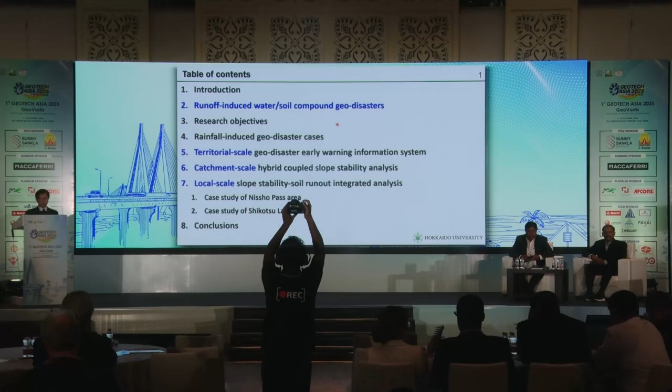First, I'd like to introduce the background of this research. Geo-disasters such as shallow landslides and debris flow occur widely and frequently in Asia. Torrential rainfall from sources such as typhoons and the rainy season is one of the main causes. Besides, the IPCC forecasts that the frequency and intensity of torrential rainfall are expected to increase as extreme weather events become more frequent in the future. Therefore, it is very important to study the mechanism of rainfall-induced landslides with consideration of the runoff surface flow for better hazard control in the near future.

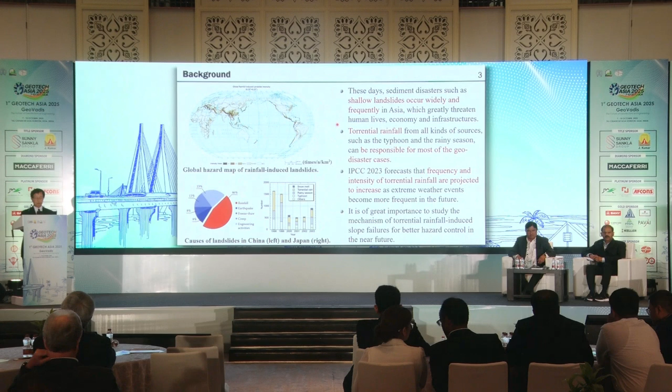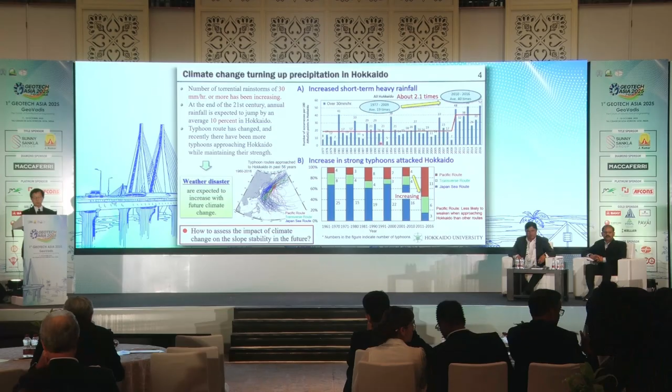Please note that this table is from the Japanese Meteorological Agency. In general, in case of rainfall intensity over 30 millimeters per hour, soil ground cannot absorb all the rainwater, and rainwater begins to run off onto the ground surface. Therefore, this assessment for heavy rainfall-induced slope failure should be done by considering rainfall infiltration and surface runoff.

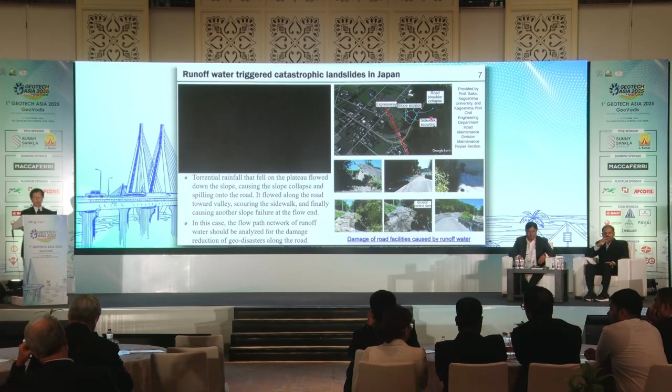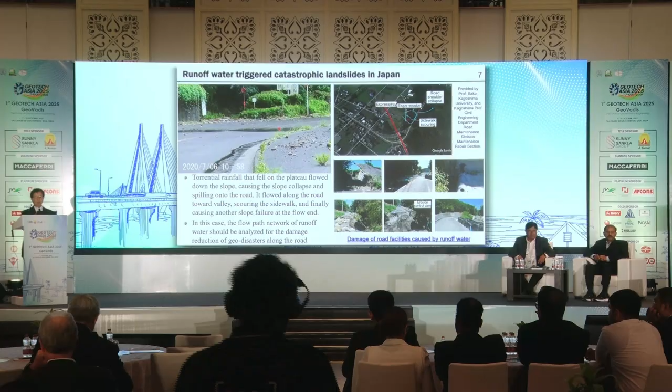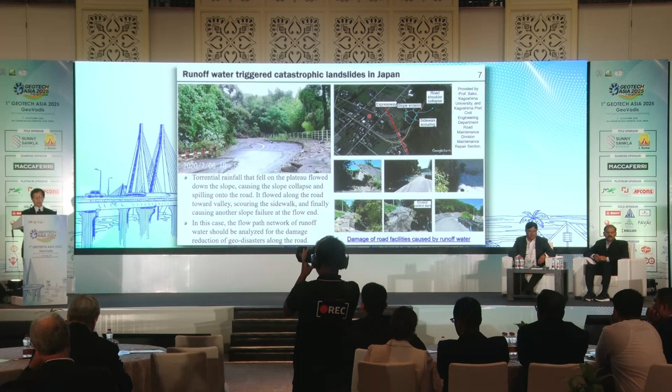Then, I'd like to introduce the runoff-induced water-soil compound geodisaster. What is it? This slide introduces one example of the runoff-induced geodisaster during torrential rainfall. Rainfall that fell on the plateau flows down the slope, causing slope failure, and also flows down along the road, moving toward the valley, scouring the sidewalk, and finally causing slope failure at the flow end. In this case, the flow network of the runoff water should be analyzed for damage reduction of the geo-disaster along the road.

This is another example of runoff water triggering a catastrophic landslide in Hokkaido. In this geo-disaster, as shown in the figure, many serious slope failures occurred at the cross point of the flow path and road network. This is because these factors cause accumulation of topography of the surface flow and seepage flow. If the rainfall intensity is higher than the infiltration capacity of the ground, rainwater that cannot infiltrate into the soil ground flows down the ground surface. Therefore, the risk of heavy rainfall-induced slope failure should be evaluated by considering both surface flow and seepage flow.

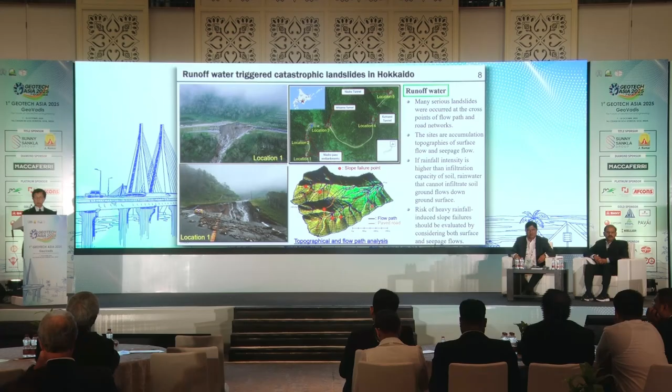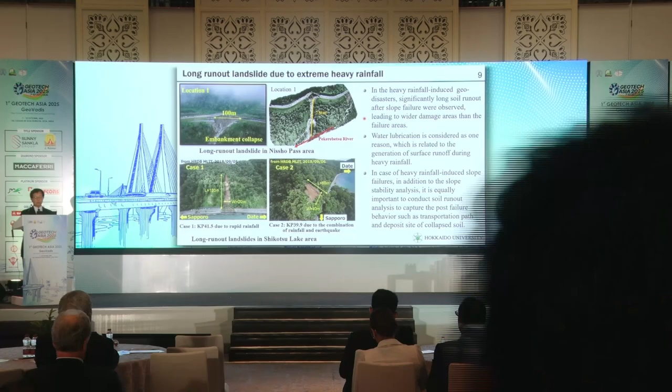In addition, these figures show three previous serious landslides that occurred in Hokkaido. In these geo-disasters, significantly long soil runout, as shown in this figure, was observed, leading to a wider damage area than the failure area. In this case, water lubrication is considered as one of the reasons for this phenomenon. Therefore, in case of heavy rainfall-induced slope failure, in addition to slope stability analysis, it is important to conduct soil runout analysis to capture the post-failure behavior, such as the transportation path and deposit site of the collapsed soil.

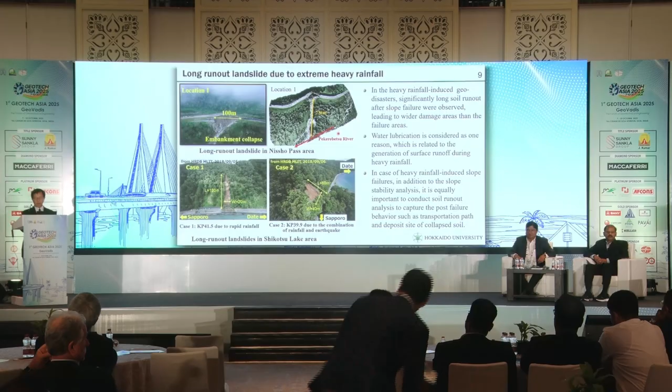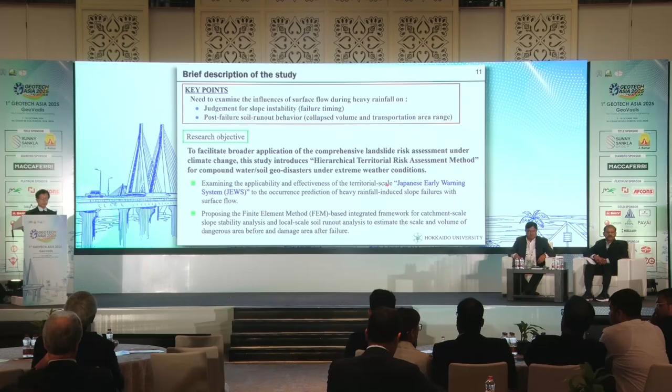Keeping in mind these key points laid out in the introduction, this study introduces a hierarchical territorial risk assessment method for the compound water-soil geodisaster under extreme weather conditions. For this end, in this study, I would like to discuss two research topics. To develop the risk assessment method for rainfall-induced slope failure with surface flow, we propose a hierarchical territorial risk assessment for the compound water-soil geodisaster by using multi-phase and multi-scale analysis, as shown in this figure.

This method consists of three scale levels. Level 1 is a territorial scale early warning system for extracting the alert mesh. In Japan, we announce warning information in a 1 kilometer by 1 kilometer mesh. This is the minimum area used in Japan.

Level 2 is the catchment scale slope stability analysis. If we use a very high performance computer, we can do numerical estimation at 1 kilometer by 1 kilometer scale. The last one is level 3, local scale soil runoff analysis, where we estimate the disaster-prone area.

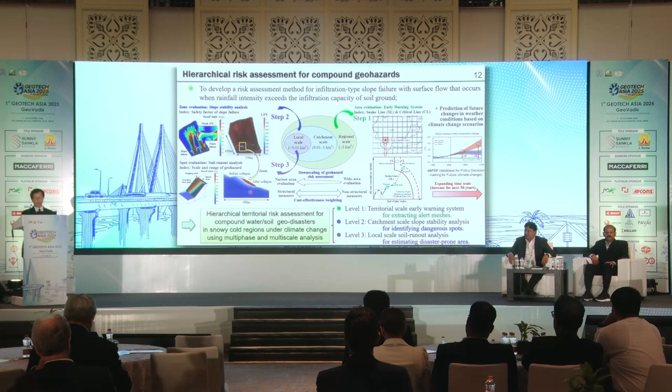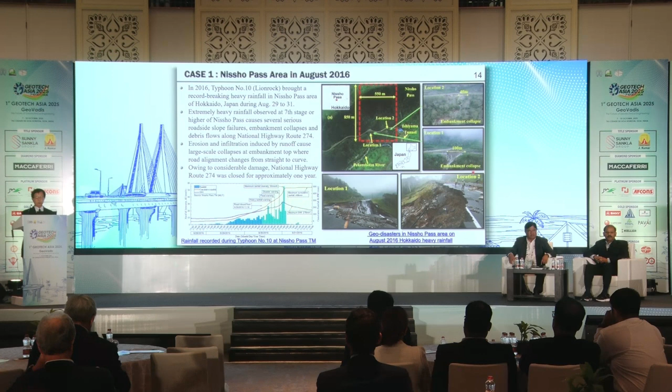First case is a slope failure in the Nissho Pass area in August 2016. Extremely heavy rainfall caused several serious roadside slope failures. Along the national highway, as shown in this figure, at the seventh stage of the Nissho Pass, erosion and infiltration induced by the runoff caused a large-scale collapse like this. Owing to the considerable damage, this highway was closed for approximately one year.

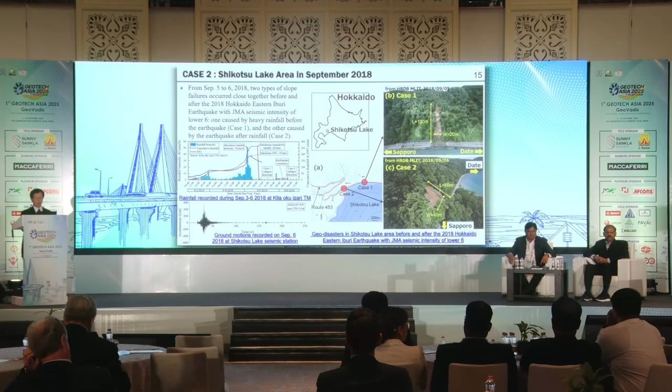Next, second case study is a slope failure in the Shikotsu Lake area in September 2018. From September 5th to 6th, 2018, there are two types of slope failure close together before and after the very serious earthquake. Case 1 is caused by heavy rainfall before the earthquake, and case 2 was caused by the earthquake after the rainfall.

Then go to the first scale level. I would like to discuss the territorial scale geodisaster early warning information system. First, I'd like to briefly introduce the territorial landslide early warning system employed in Japan. The Japanese government initiated the new nationwide early warning system for geodisaster in 2005.

The early warning system is a comparatively novel numerical model for rainfall-induced shallow landslides. Based on this system, the Japanese government announces sediment disaster warning information and evacuation information to residents in the dangerous area.

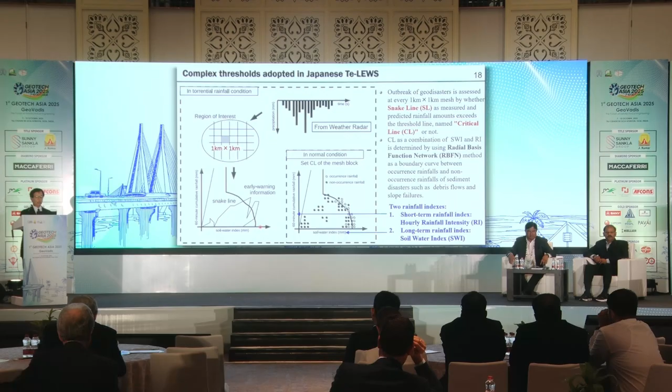In the Japanese early warning system, outbreak of the geodisaster is assessed by a 1 kilometer by 1 kilometer mesh, by checking whether the snake line, which consists of the measured and predicted rainfall amount, exceeds the threshold line named the critical line. In this case, the snake line exceeds the critical line, then the slope failure occurs.

Next, I would like to verify the applicability of the Japanese early warning system by confirming the relationship between the critical line and snake line. In both slope failure cases, the snake line exceeded the critical line near the estimated time of the slope failure. This indicates that the Japanese early warning system appropriately detects the occurrence of slope failure, even in landslides caused by heavy rainfall where surface runoff was observed. This demonstrates that the applicability of the Japanese early warning system as a territorial scale risk assessment method for rainfall-induced landslide disaster is sufficiently high.

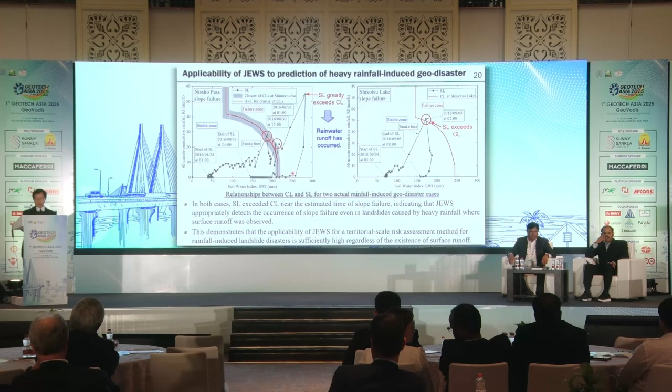So using this kind of prediction method, we can correctly predict the occurrence of slope failure. However, this is only for the 1 kilometer by 1 kilometer mesh, so we do not know the correct location of the slope failure. Therefore, we need to do catchment scale hybrid coupled slope stability analysis.

To develop the risk assessment method for the infiltration type slope failure with surface flow, where rainfall intensity exceeds the infiltration capacity of the soil ground, we employ a hybrid coupled model of surface flow, subsurface flow, and soil mechanics as shown in this figure. The effect of surface water flow is usually neglected in traditional slope stability analysis. Using this method, we can examine the effect of surface water flow on the local safety factor of the soil element by analyzing the runoff, infiltration, and slope instability simultaneously.

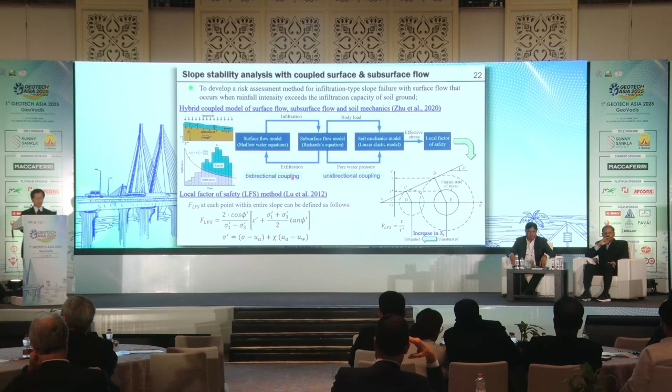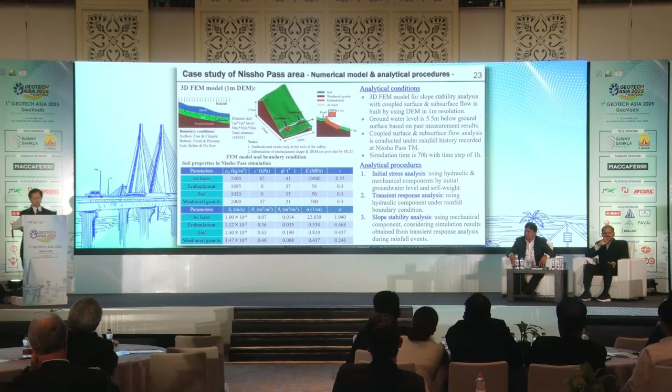This slide shows the hydraulic behavior of the simulation site. As shown in this figure, rainfall intensity increases, infiltration capacity gradually decreases, leading to the generation of surface runoff, when the rainfall intensity exceeds the infiltration capacity.

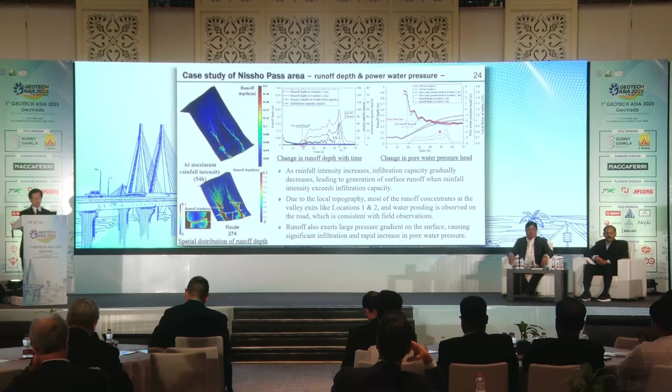As shown in this figure, due to the local topography, most of the runoff concentrates at the valley exit, like location 1 and location 2, and water ponding observed on the road, which is consistent with field observation. And runoff also creates a large pressure gradient on the surface, causing significant infiltration. Therefore, we can observe a rapid increase in pore water pressure as shown in this figure.

This slide shows the mechanical behavior of the simulation result. As shown in this figure, local safety factor rapidly decreases with the increase in pore water pressure after surface runoff generation. This indicates the adverse effect of surface flow on slope stability.

Besides, as shown in this figure, the location and length of the estimated danger spot by numerical simulation agree well with the field investigation. However, though the landslide with a shallow depth at location 2 can be well reproduced.

However, in case of location 1, due to the neglect of the progressive slope failure mechanism and surface erosion caused by the high velocity surface flow, the depth of the slip surface is underestimated.

Actually, as shown in this figure, the maximum runoff velocity at location 1 greatly exceeds the critical erosion velocity, while it is noted that the excess at location 2 is small.

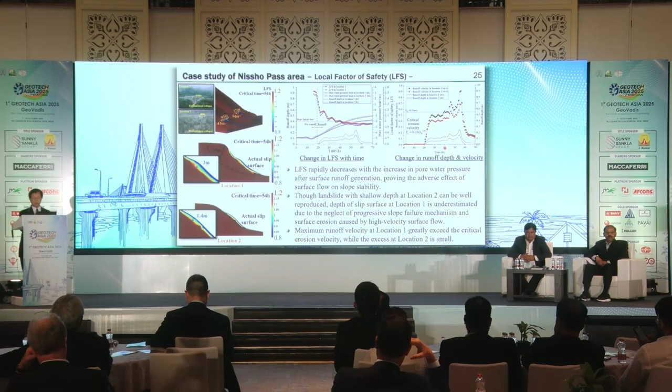This slide shows the simulation result for the Shikotsu Lake area. The trend of the simulation result is similar to the Nissho Pass. However, the simulated unstable zone closely matches the field condition, unlike location 1 at the Nissho Pass.

This is because in this case, runoff velocity briefly exceeds the critical erosion velocity, while both magnitude and duration of the exceedance are smaller as compared with location 1. This means that the occurrence of surface flow erosion is limited, like location 1 and location 2 at the Nissho Pass.

Consequently, the surface runoff plays an important role in promoting rainfall water infiltration and triggering slope failure. These numerical simulation results also demonstrate the capability of the catchment scale hybrid coupled slope stability analysis to accurately identify the occurrence spot and dangerous area of heavy rainfall-induced slope failure.

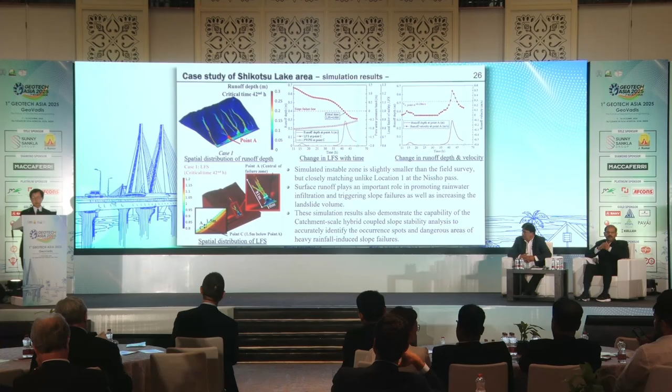Finally, let's go to the third scale level about the local scale slope stability and soil runout integrated analysis.

To develop the risk assessment method for modeling the complex dynamic behavior of post-failure soil water mixture, considering the surface flow and subsurface flow under heavy rainfall, we employ the slope stability and soil runout integrated analysis as shown in this figure.

In this study, we integrated the slope stability analysis with the soil runout analysis using the depth average equation to study the slope failure and subsequent landslide transportation process, for more computational efficiency in large-scale complex phenomena. Three minutes, okay.

Actually, in this flowchart, the first step is the slope stability analysis, which is the same as the former section. The second step, the next step, is the soil runout analysis.

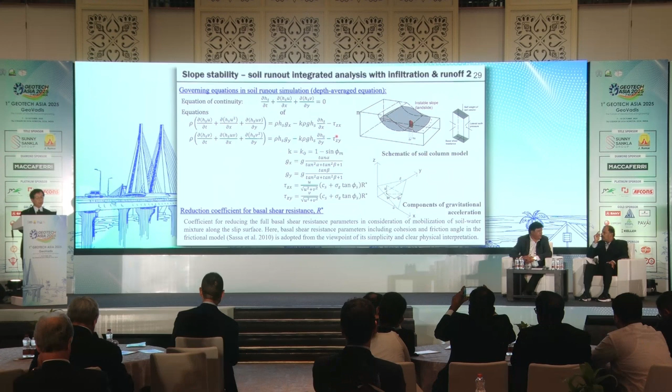Using this kind of equation, we can evaluate the soil runout failure. This slide shows the first case study, that is Nissho Pass location 1. The numerical model and the material flow parameters for the soil runout analysis are shown as follows.

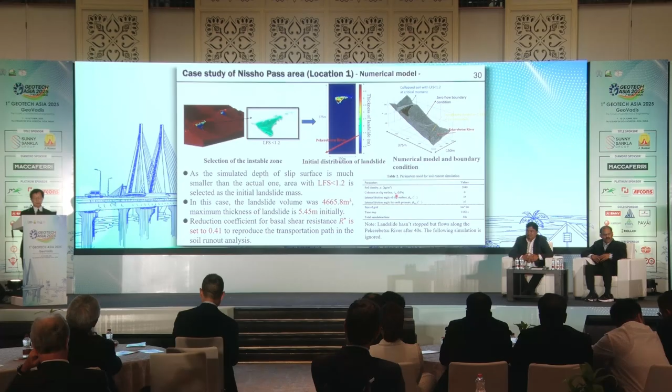As the slip surface is underestimated in the slope stability analysis, the area with local safety factor less than 1.2 is selected as the initial landslide mass. Also, the reduction coefficient of the basal shear resistance is set to 0.41 to reproduce the transportation path in the soil runout analysis.

This is the result of location 1. In the case without reduction of shear resistance, no obvious soil runout behavior is observed. However, if we use the reduction coefficient, the soil runout simulation can successfully reproduce the soil runout process photographed by the UAV, which demonstrates the effectiveness of the calibrated parameter.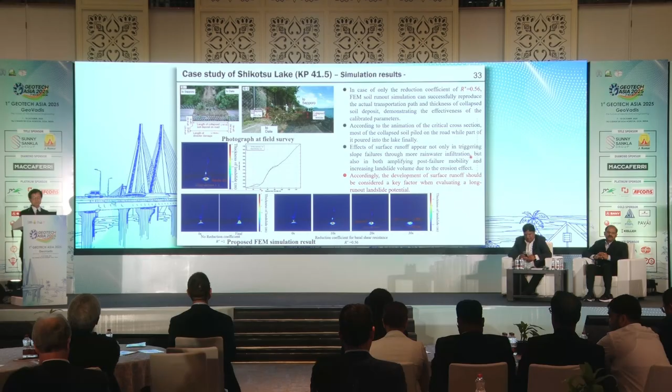So maybe if we want to use this kind of investigation, we can use this relationship. The reduction of the local safety factor and the reduction of shear resistance is closely related to the landslide velocity and landslide density.

Now let me summarize my talk. This study introduced a hierarchical territorial risk assessment method for compound water-soil geodisasters, and applicability and effectiveness were examined through two case studies of extremely heavy rainfall-induced geodisasters that occurred in Hokkaido, Japan.

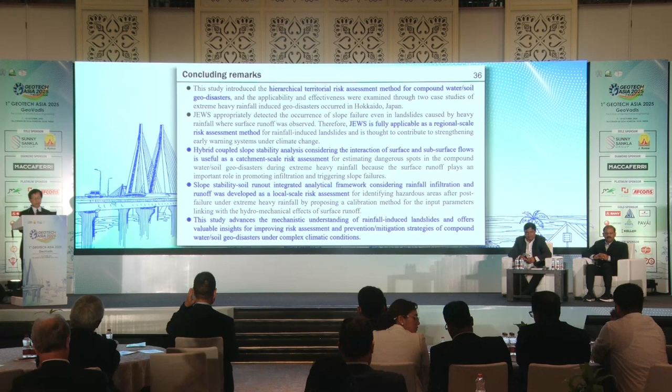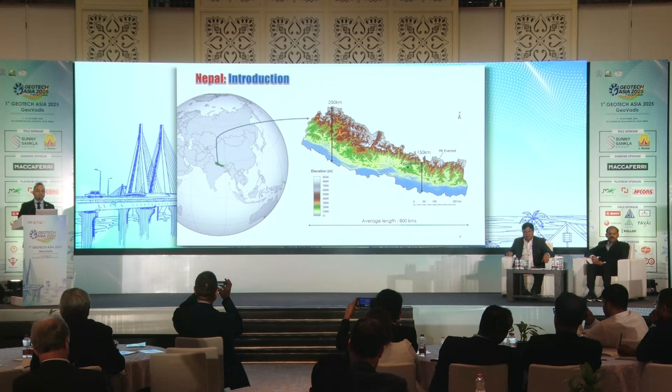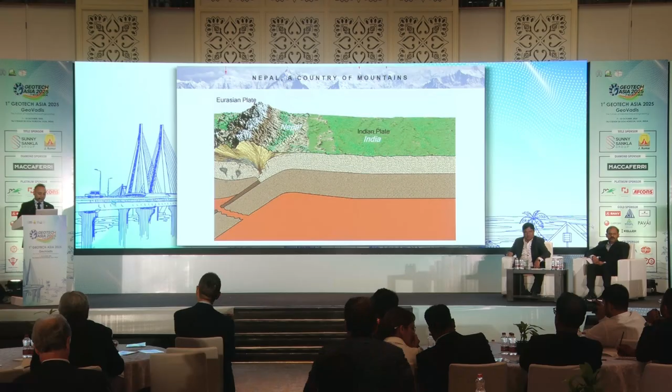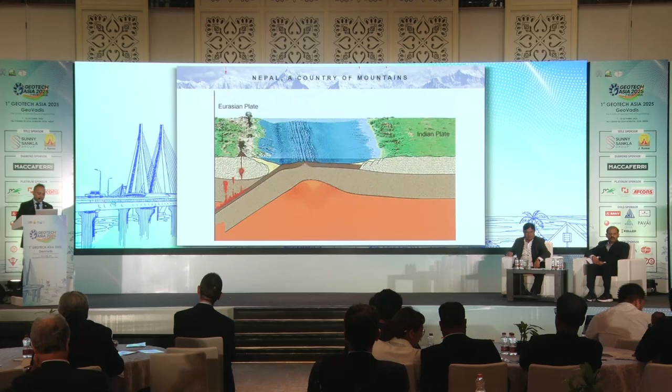I believe we are all aware of the tectonic movement of this region, the Hindu-Kush region. The Indian plate is moving northward towards the Eurasian plate at a rate of about 1.8 to 4 centimeters per year, depending on the specific location and measurement methods. The average convergence rate near the Himalaya, near Nepal, is around 4 centimeters per year. This results in the formation of beautiful mountains and Himalayas.

The world's eight highest Himalayas, including Mount Everest, are in Nepal. Interestingly, these Himalayas are the freshwater source for about 1.9 billion people, that means one-fourth of the world's population. These are the largest sources of fresh water beyond the polar regions.

Okay, from the beauty and the sceneries, now I want to take you towards the earthquake and the disaster. This Hindu-Kush Himalaya region extends across the country from Afghanistan to Myanmar, almost 8 countries, forming one of the most seismically active mountain belts on Earth.

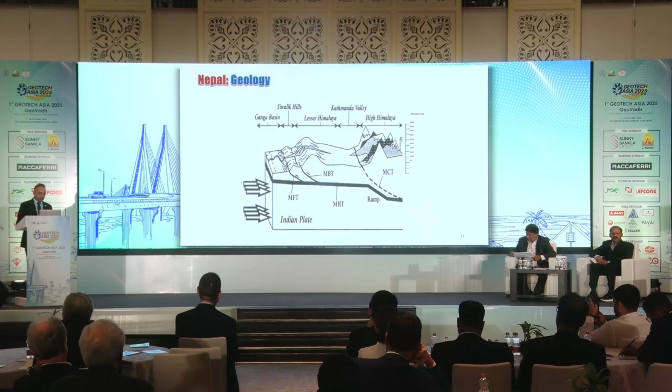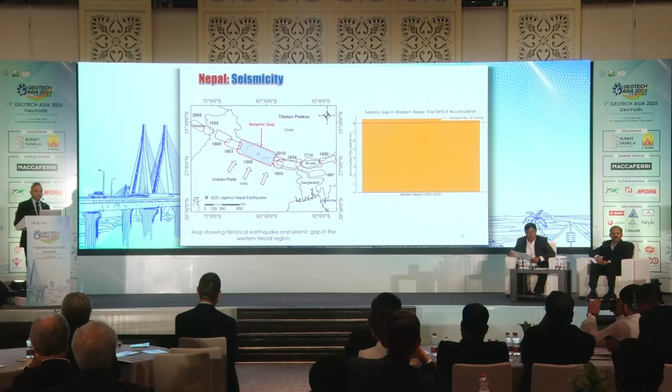This is the disaster perspective of Nepal due to risks of long, steep and fragile mountains. During the time of earthquake, we had risks of liquefaction in the valley and the Tarai region. We have risks of landslide in the mountains and Himalayas, risks of GLOF, and also risks of avalanches, and all the disasters have a cascading effect.

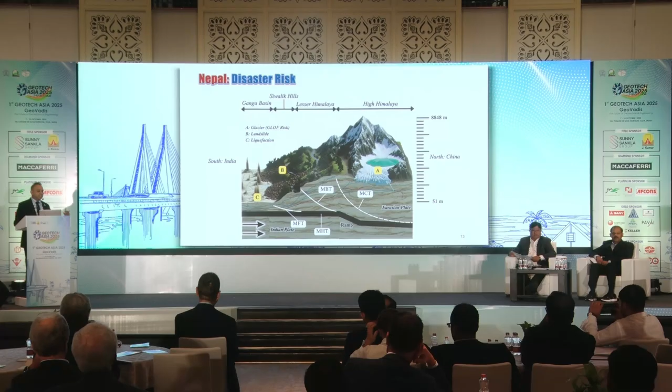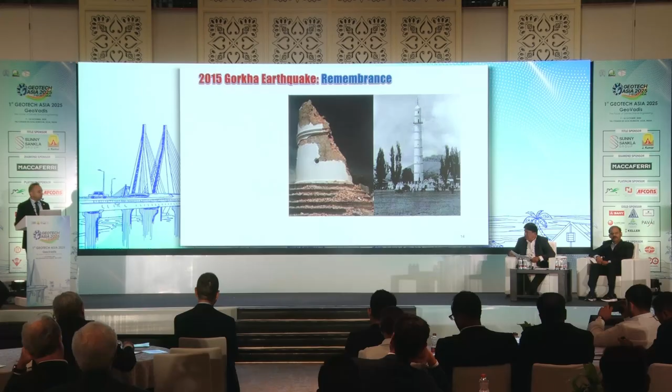Now let's travel to the Gorkha earthquake disaster. This is one of the monuments of Nepal. It was built almost 200 years ago for military purposes and is considered a monument of pride for the Nepalese. It was totally demolished during the earthquake. The Gorkha earthquake had a magnitude of 7.8, a depth of 8.2 km, and was almost 76 kilometers west of Kathmandu.

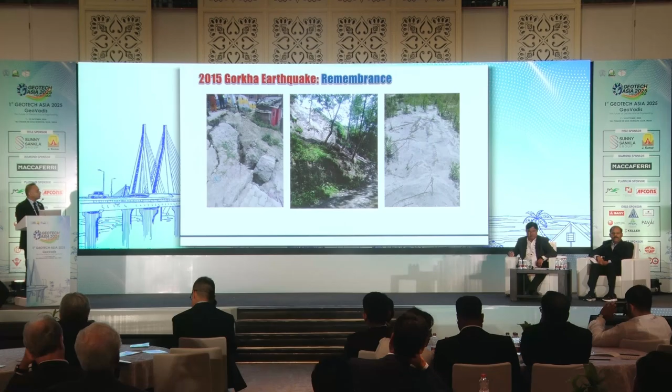This is the photograph near the Kathmandu Valley, in the countryside of Kathmandu Valley - the side picture. This picture shows the liquefaction that occurred in Kathmandu Valley. This shows the landslides, and this is the land subsidence in Kathmandu.

In the Gorkha earthquake, the peak ground acceleration was not as much as expected. It was only 0.183, although we experienced signs of liquefaction in 26 places. After calculating the factor of safety with borehole data of around 400 boreholes in Kathmandu Valley, the points where signs of liquefaction were seen lie in the high risk zone. This shows that if we have an earthquake of larger PGA, we can experience liquefaction in a larger part of Kathmandu Valley.

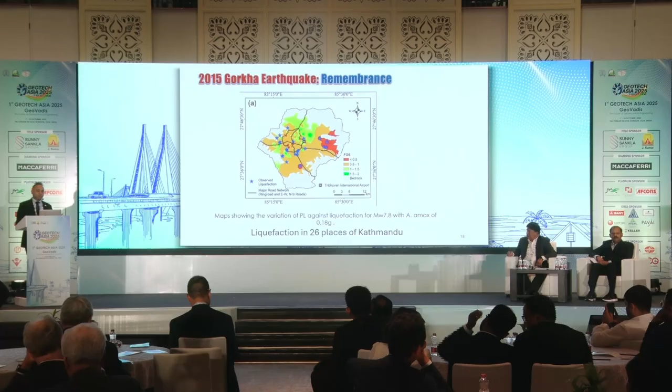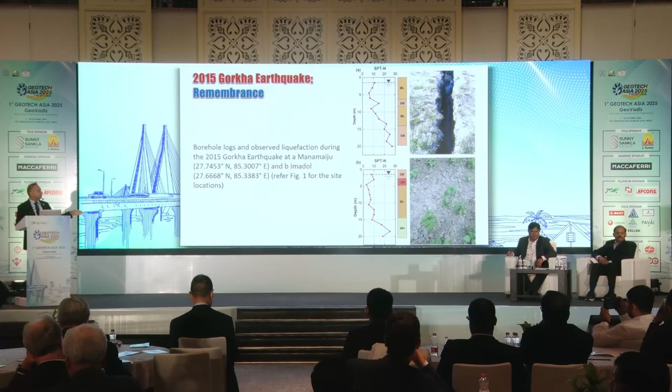These are the places where we had liquefaction, and the boreholes from those places show very low SPT values. These are places in the mid-city with liquefaction and land subsidence, where buildings are tilting - although structurally they seem stable, due to land subsidence they are tilting here and there. This is in the Thamel area of Kathmandu, a touristic place full of hotels, where the buildings were tilting in this way.

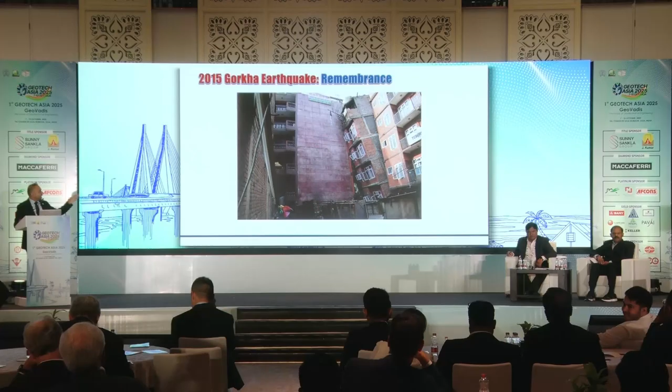We did a good reconstruction and showed the globe that we had completed the reconstruction in a good way. We almost reconstructed 90% of houses. We trained more than 3,500 engineers for the retrofitting, and also produced skilled manpower.

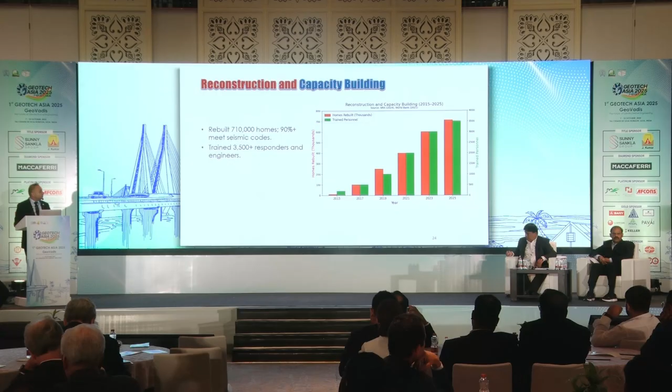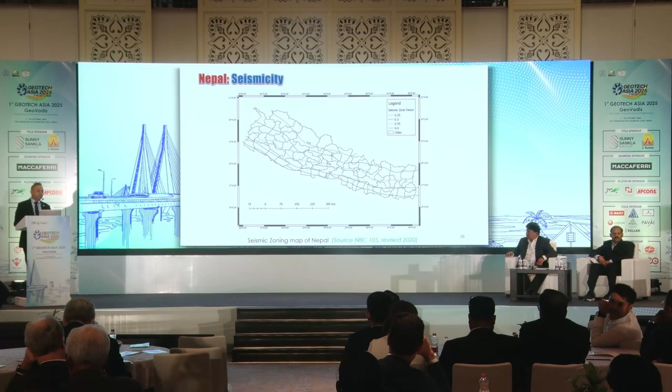The Jajarkot earthquake, I call it a bad reminder, because we said to the people, to the globe, that we had finished in a good way. We did the reconstruction, we have trained many engineers. But almost after 10 years of the Gorkha earthquake, the same situation happened.

Now let's take a tour of the Jajarkot earthquake, which was a little bit small, very small compared to the Gorkha earthquake, only 5.7 magnitude, and the effect was almost in a 10-kilometer area. In that 10-kilometer area, almost all the buildings were damaged.

In Jajarkot also, regarding the ground acceleration, we do not have too many recording stations, but the nearby station showed the ground acceleration was not so high, less than 0.1 G. We also had ridge effect, basin effect, and local site effects, all in one place.

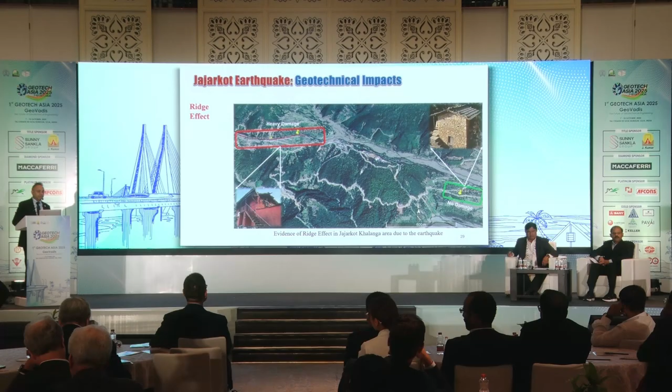Here you can see the ridge effect. The settlements in Nepal are basically on ridges and some in the valley riverside. The buildings on the ridge were totally damaged at the time of the landslide and earthquake.

In this picture you can see Rimnaga, where the highest number of people died in this village. It was nearby the river, and here we had the basin effect.

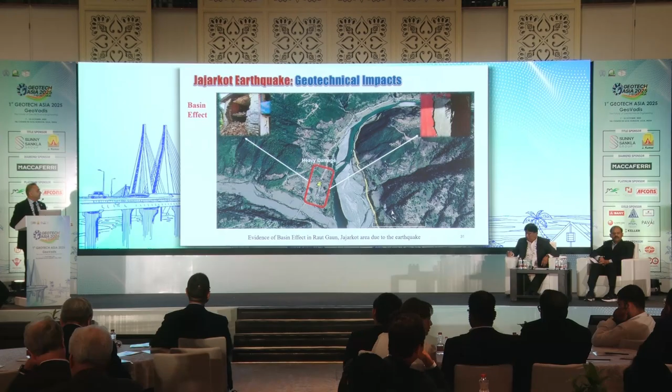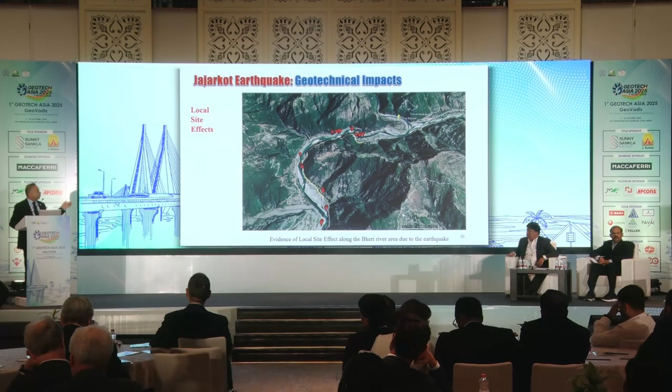This is also another example of the basin effect, and we also had local site effects. There were some river deposit villages, and in places where there was river deposition, the structures established in these deposits were highly damaged.

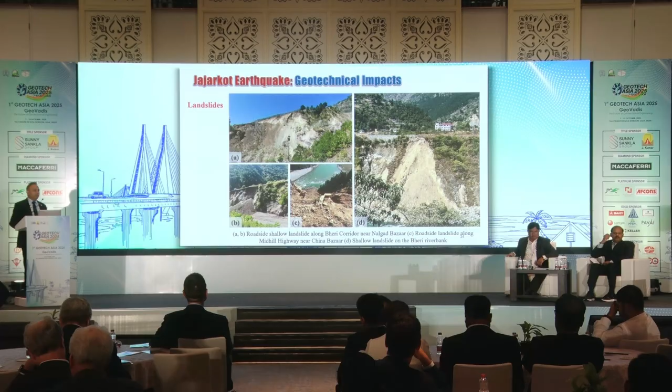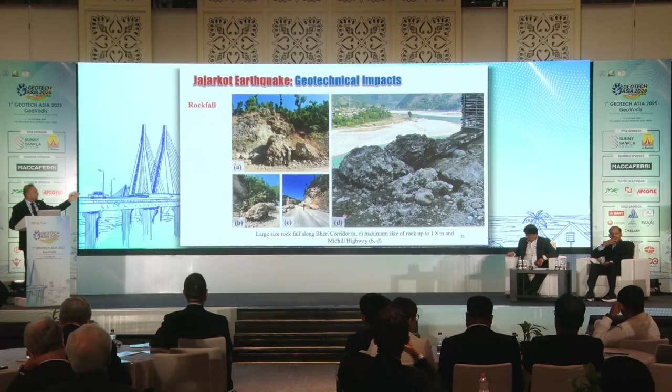We experienced more than 160 landslides at these places. These are the landslides that we measured in the field. Here our team is measuring the size of rocks that fell on the highway.

We are measuring the condition of the highway, this is a Midhill Highway, at the time of that Jajarkot earthquake. These are the structures that fell due to the earthquake, and the roads also had subsidence failure.

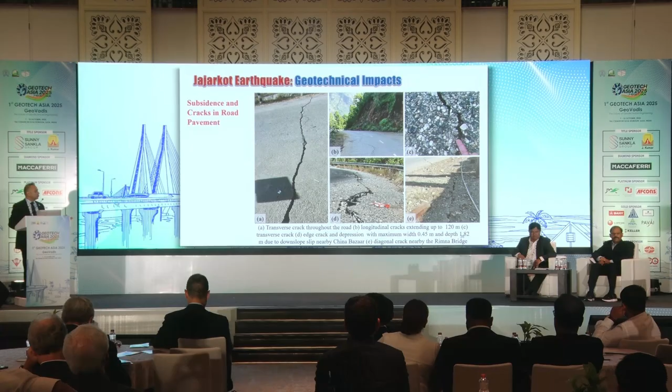This is the area we surveyed, and these are the typologies.

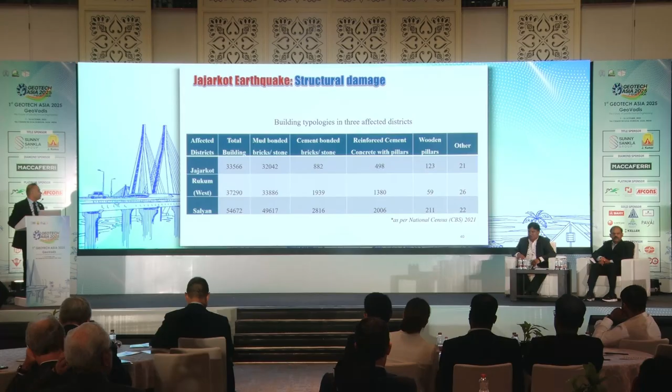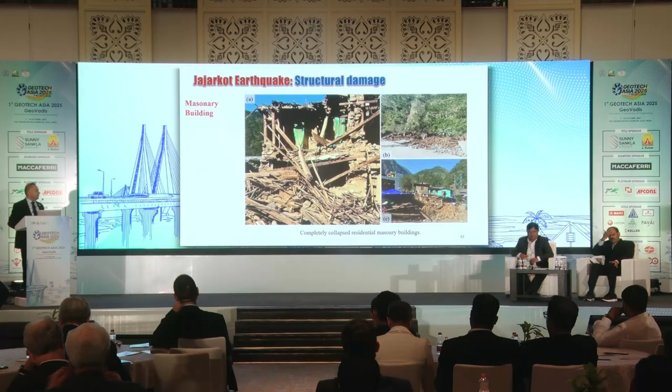Most of the masonry structures are totally damaged in the Jajarkot earthquake too. Here you can see the different types of failure of the structures. I will read fast.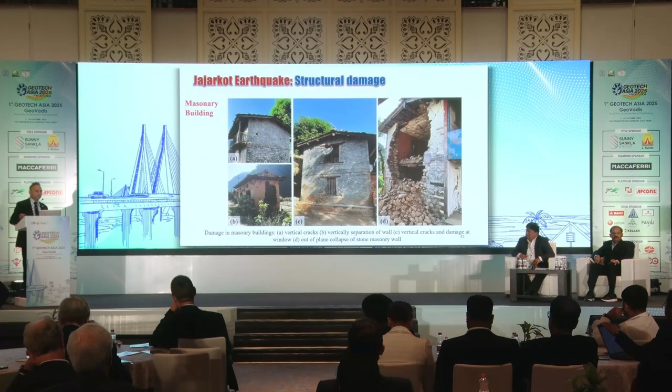The damage of masonry structures shows roof failure and failure of supporting walls of buildings, and damage of masonry buildings with out-of-plane collapse of stone masonry walls. There we can also see the masonry walls are damaged.

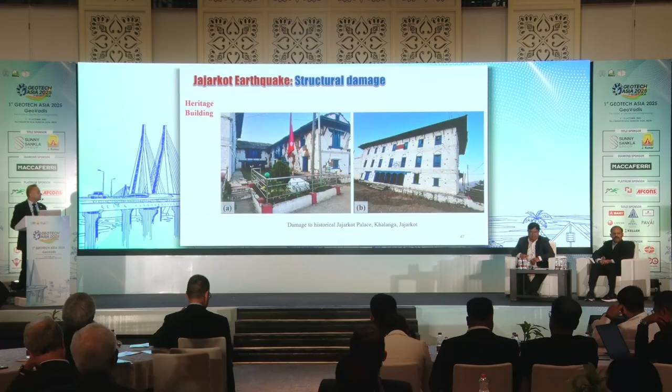This is one of the historical buildings, constructed almost 600 years ago. It's the palace of the king—there were many small kingdoms in the country—and it was also almost completely damaged.

For the RCC buildings, they are safe, but some points and joints were cracked. They were safe to stay in with minor maintenance.

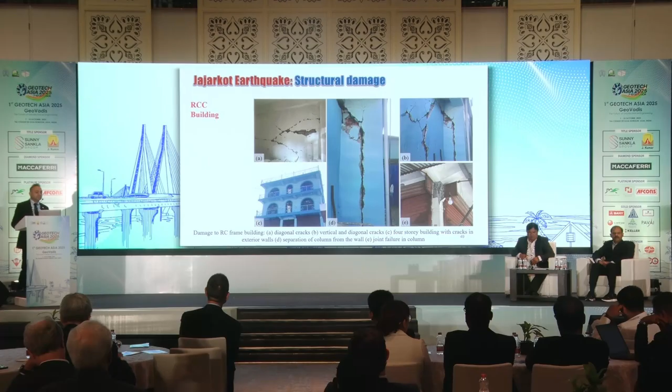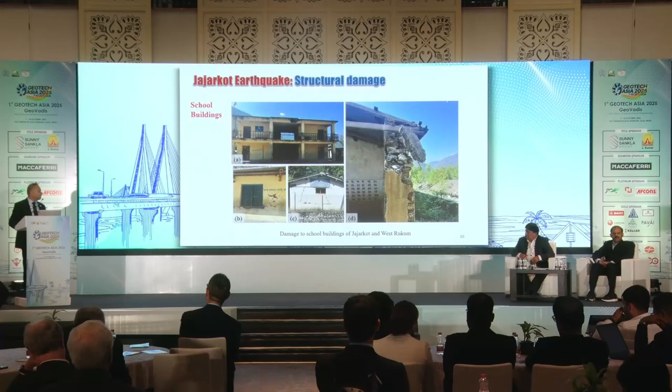These are the school buildings. In this area, most school buildings are in this condition. The buildings with an RCC framework can be used after some maintenance, but the masonry buildings were totally damaged in the Jajarkot area too.

There was a bridge, only one RCC bridge in that corridor, a stable RCC bridge. The deck, the slab of the bridge, was shifted by about 2 inches. This showed how such a small earthquake can shift the deck of a bridge.

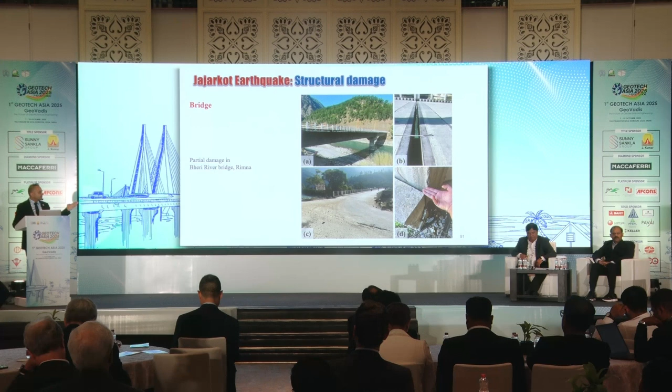This is an example of different geotechnical effects—ridge effect, valley effect—that can influence vibration or seismicity. This is one example where just a low PGA and low magnitude still shifted the deck of the slab of the RCC bridge.

There may be different causes. One cause may be people are waiting for help instead of working hard. Another cause is people are not aware of what to do. Some people don't have enough to build houses, but even people who have money may be waiting for the government. So we are not able to reconstruct in the Jajarkot area.

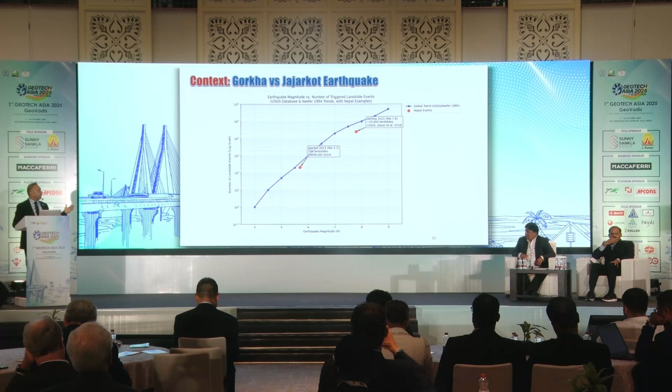When we discuss the landslide pattern, this is the earthquake magnitude versus landslide graph suggested by USGS. But in the Nepal case, although the mountains were young and still fragile, the number of landslides was less. It may be because both earthquakes were not in the rainy season or just after the rainy season. But it's sure that landslide occurrence in such fragile regions is lower than expected.

Talking about the groundwater table, we have fluctuating groundwater levels. Nepal's most populated areas, in the valley and the Tarai belt, depend upon groundwater, and past research showed that the groundwater rises, but in Nepal's case it varied greatly from place to place. This showed that Nepal has a lot of difference in geology; we cannot generalize all the conditions at the same time.

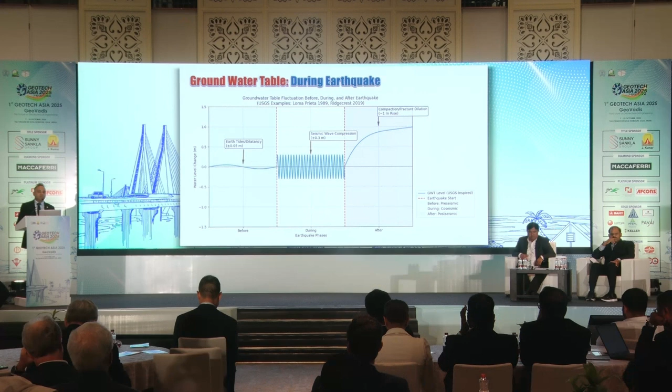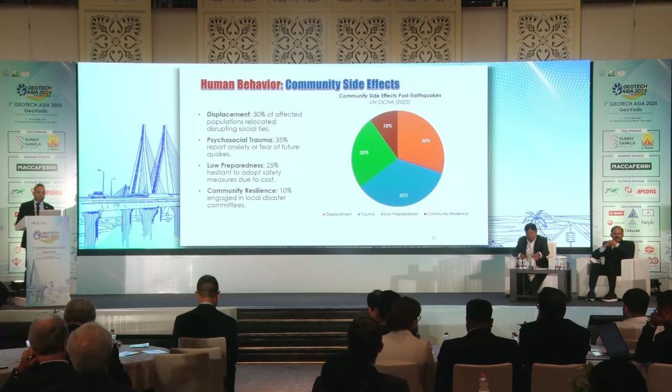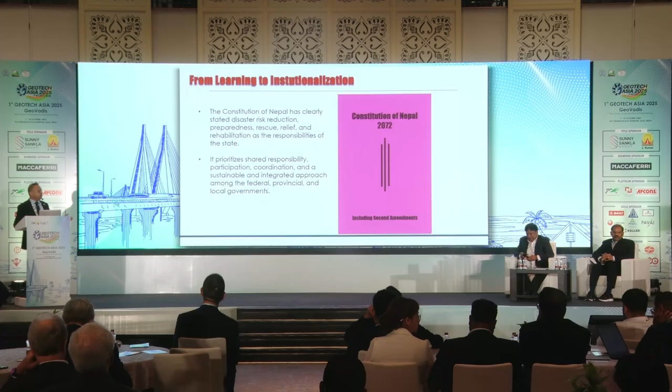The good thing is we made the constitution in 2015 after the Gorkha earthquake, so we put the concept of DRR into our constitution. Preparedness, rescue, relief, and rehabilitation became the responsibility of the state, with priority given at all levels of government. At that time we had reconstruction underway.

We had the institution National Reconstruction Authority, and it was an independent body. With the help of NRA, I think we succeeded in doing this work, being an independent body helped us succeed in the good way. Now we have constituted the National Disaster Risk Reduction and Management Authority. It is also an independent body, but it is not functioning so well, although it has a different organization from the local body to the central body.

After the disaster, Nepal's academic institutions started earthquake engineering and disaster courses in different universities. Before the earthquake, very few researchers worked in this sector at the higher study level, and society is also responsible for this type of disaster response. The Nepal Engineers Association trained people to do damage result assessment of 65,000 buildings voluntarily. The most important thing we learned is that the people of Nepal, after the disaster, have hope, faith, and trust towards the engineer.

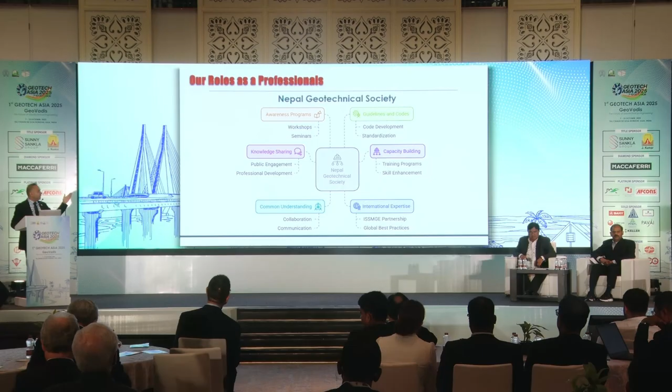There are some causes of disconnect between policy and implementation, which explains why we failed in the Jajarkot earthquake. Nepal Geotechnical Society has also done many works for disaster preparedness. This society is preparing the geotechnical building code for the Nepal government. We have different awareness programs, knowledge sharing programs, and capacity building programs.

We developed our GeoHazard course together with BGC Engineering Canada. This is a very nice course, and the Asian Development Bank has taken this course curriculum as the best course. I am implementing it in Bhutan and other countries also.

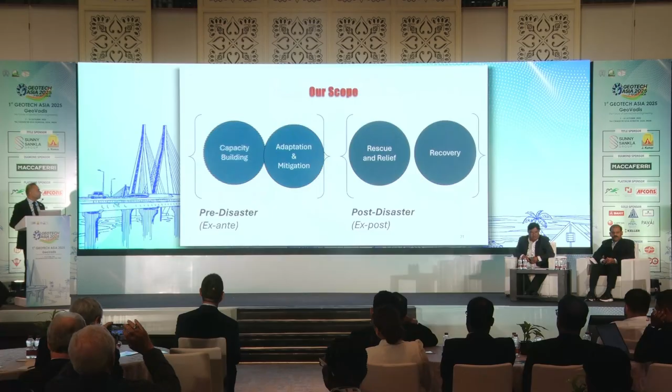These are some programs we have run in Nepal, and we know we are working for the residents. For this, we have to build our capacity, and to build our capacity we have to be strong from our side. Thank you for listening to me, and I would like to take this opportunity to welcome you to the next Geomandu and the 17th AYGC in Kathmandu. Thank you.